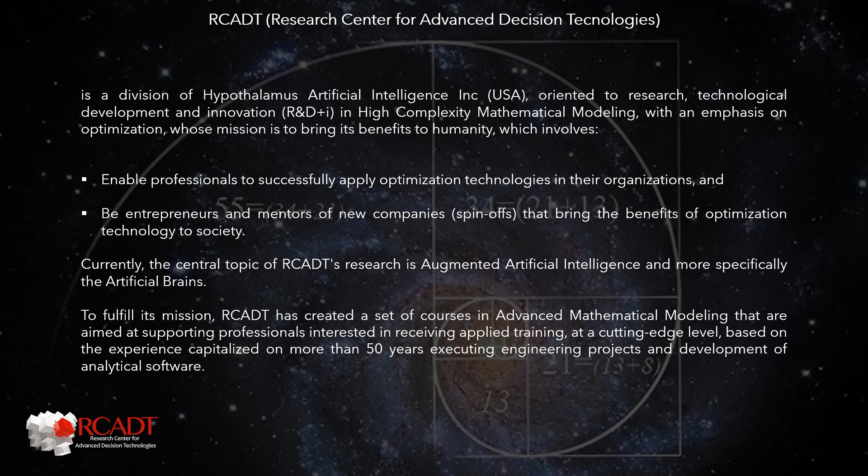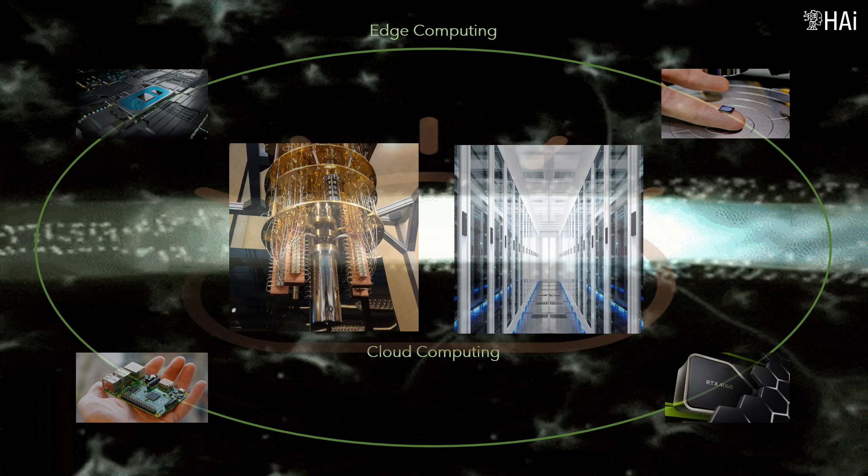Parallel thinking: like paper-based math, sequential math for single-processor computers is dead. As in the human brain, in the future only parallel mathematical thinking will be practical. The new analytics are autonomous, parallel, and distributed.

Objective and structure: the material covered in the course spans two broad areas of applied mathematical programming — oil and gas systems and markets modeling, and implementation of O&G enterprise-wide optimization systems. Both topics are addressed from HI's vision of multi-problem mathematical models, in which the development of computer solutions is oriented from the programming of algebraic formulas to the structuring of models, integrating the problems that make it up, like a Lego game.

The student will learn about the main technologies for the implementation of mathematical programming algorithms, and will learn to see them from this point of view, typical of Industry 4.0. But it is not a specialized course in algorithm implementation.

Structure: the course is based on specialized academic activities aimed at training the participant in the main mathematical problems that must be solved in the strategic and tactical planning, operations scheduling, and process control of oil and gas systems and markets. The basic unit of the course is the virtual session, with an average duration of 90 minutes each.

To do this, the classes are recorded on video by artificial intelligence. The classes are grouped into modules that cover the petroleum product supply chain. After watching the videos, students must attend face-to-face virtual sessions in which the course teacher will clarify existing doubts. Two conversations are held monthly, and students should submit their questions in advance.

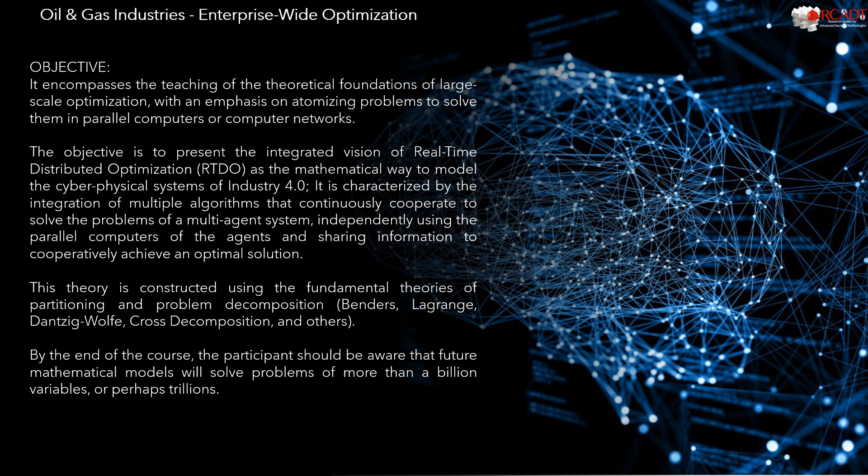The course covers the following topics: next-generation analytics and advanced computing, parallel thinking for the partitioning and decomposition of complex systems, oil and gas industries, enterprise-wide optimization, specifically Benders' partition theory, Lagrangian relaxation, Dantzig-Wolfe decomposition, cross-decomposition, subrogate programming, and asynchronous parallel optimization, sliding optimization, advanced concepts of artificial brains, and implementation of oil and gas industries enterprise-wide optimization in the real world.

For the different methodologies, examples of real-world problems and computer programs are presented, so that the student understands the application of what is taught.

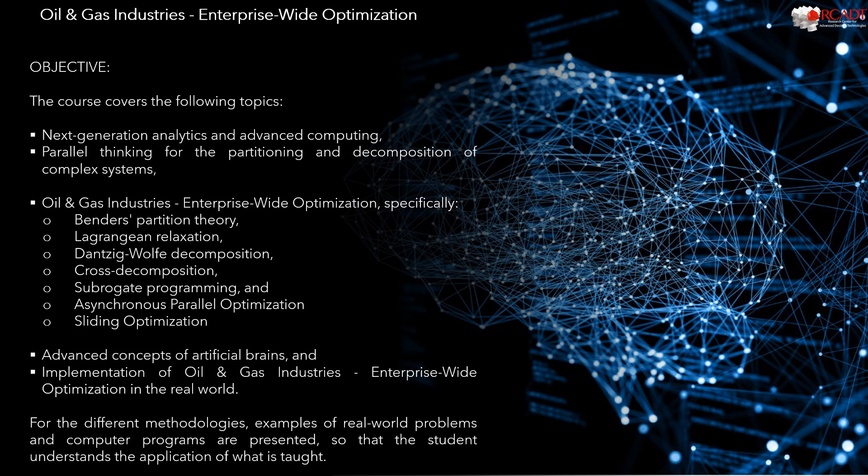Aimed at professionals, engineers, data scientists, mathematicians, physicists, consultants, economists, software developers, etc., who require and/or wish to become experts in mathematical modeling, acquiring the knowledge to handle the state-of-the-art parallel and distributed analytical level, using mathematical programming intensively.

This continuous training program strengthens the analytical skills and professional criteria of the participants, so that they can exercise, share and/or supervise, with propriety, the professional functions of this branch of knowledge, in accordance with the state-of-the-art methodologies and technologies that support the digital transformation of companies.

The course is aimed entirely at the oil and gas sector; therefore, all the material will deal with this industry and other energy-related businesses. Obviously, those who get the most out of the course are mathematical modelers expert in the oil and gas industry. But executives, managers and engineers in the industry are trained to understand the present and future of artificial intelligence for decision-making, to structure and participate in projects of this science of the future.

Artificial intelligence is accessible to everyone, but understanding its true scope requires proper training. AI can teach knowledge, but it cannot create understanding. This is the responsibility of the student.

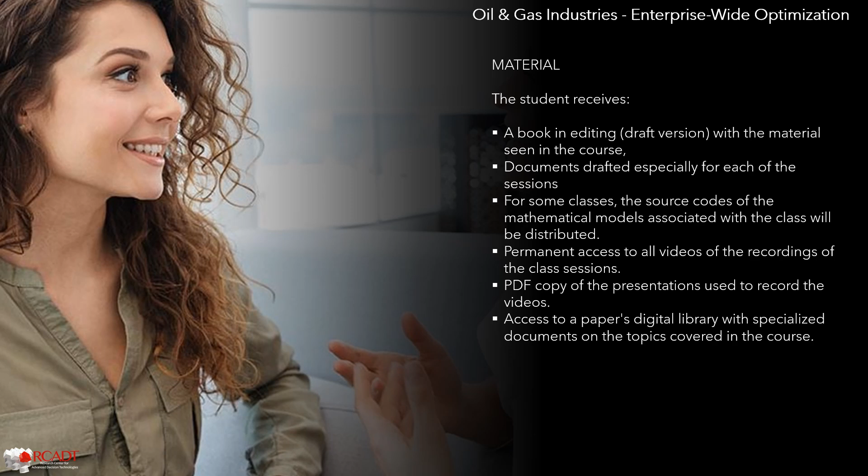Material. The student receives a book in editing, draft version, with the material seen in the course, documents drafted especially for each of the sessions; for some classes, the source codes of the mathematical models associated with the class will be distributed. Permanent access to all videos of the recordings of the class sessions. PDF copy of the presentations used to record the videos. Access to a papers digital library with specialized documents on the topics covered in the course.

Project. If the student wishes to carry out an advanced analytics project during the course, they can indicate this to the scientific director. If accepted, an advisory program on the project would be jointly defined between the RCADT and the student.

Artificial Hypothalamus: Mathematical Programming 4.0, Autonomous Real-Time Distributed Optimization.

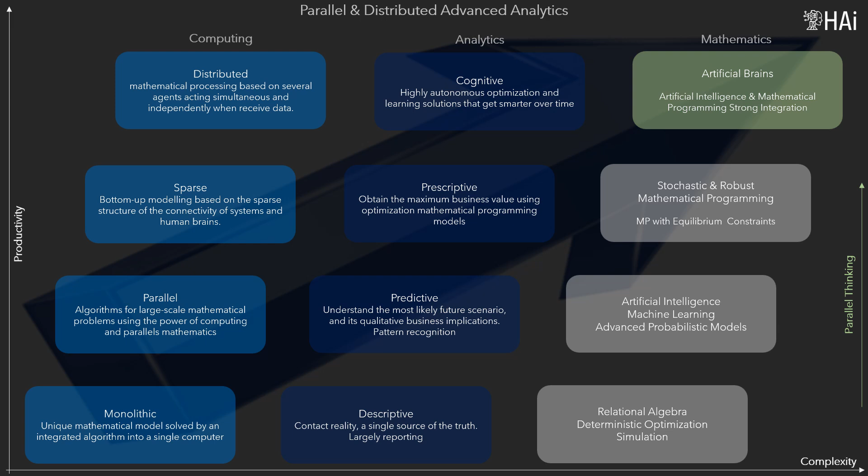Artificial entrepreneurial brains rely on the development of parallel thinking when a complex system must be analyzed. And reality is complex. The diagram presents the simultaneous evolution of 3 fundamental aspects in Industry 4.0: information technologies, analytics and mathematics.

The instructor of the course is Engineer Jesus Maria Velasquez Bermudez, Ph.D., who is the creator of the artificial hypothalamus, the result of the integration of mathematical programming with artificial intelligence based on neuroscience.

Most of the things and processes that humans use have been totally affected by technology, which has opened up the human imagination, producing previously unsuspected results. Mathematical modeling should not escape this process, starting from discovering the mathematical foundations that serve to establish the laws that govern physical, industrial, economic, biological, health, and social phenomena, and with them build mathematical models and increasingly powerful calculation algorithms.

Nowadays all knowledge and technology are available to develop a higher-level artificial intelligence, which emulates human intelligence in any type of human organization, and can be called the artificial hypothalamus of the organization. The power of today's technology is not in the mathematical calculations it allows to be performed, it is in the mathematical calculations we can imagine we can perform.

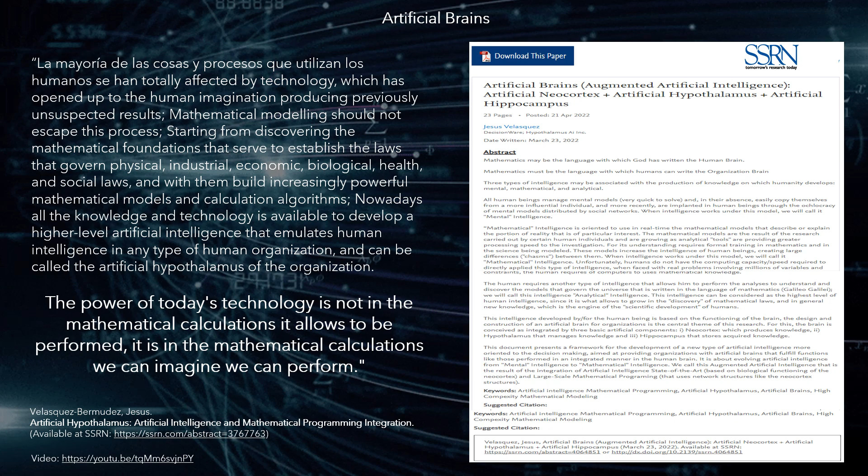The founder and chief scientist of HI is the creator of Optex, his most important technological work. The video: the history of Optex, the optimization expert system. From the simplex method to multi-problem models, Optex expertise meets artificial brains, moving toward mathematics-based general artificial intelligence.

And the article 'Optex, where optimization expertise meets artificial brains' presents the history of Optex, which is the professional history of Jesus Velasquez Bermudez. Jesus Velasquez Bermudez in 1990 created Optex, Optimization Expert System, an optimization platform that was developed with a new vision of mathematical programming. To date, Optex has completed 34 years of continuous growth and updating.

Proof of this is the current R&D plan that HI is developing to incorporate the latest achievements of AI, such as ChatGPT, to facilitate the dissemination of mathematical modeling in Industry 4.0, taking it to the level of people not specialized in the subject. You can find more information about Optex in the LinkedIn post: from simplex method to mathematics-based artificial general intelligence.

The founder of HI has focused his scientific research on the development and incorporation of parallel optimization algorithms to Optex. The algorithms created are Primal Dual Subrogate Algorithm (PDS), Multi-level Bender's partition (MBP), Generalized Stochastic Dual Dynamic Programming (GSDDP), Multi-Bender's decomposition (MBD), and sliding optimization. These algorithms, and others existing in the literature, support the implementation of artificial brains.

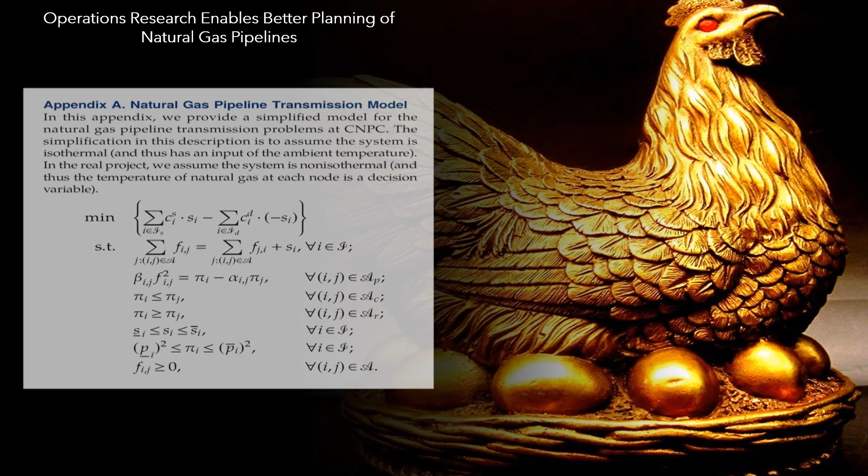The image presents the algebraic formulation of the natural gas pipeline transmission model. Without fear of being wrong, it can be said that mathematical optimization models are the goose that lays the golden eggs of China National Petroleum Corporation.

Oil and gas industries: Enterprise-wide optimization and advanced analytics solutions. The interested party can watch the webinar, in Spanish, live. Supply oil chain optimization, advanced analytics solutions, to have an overview of mathematical modeling in the O&G sector.

The oil industry includes global processes of exploration, extraction, refining, transportation and marketing of petroleum products. The largest volume products in the industry are fuels, natural gas, fuel oil, and gasoline. However, petroleum is the raw material for many chemicals, including pharmaceuticals, solvents, fertilizers, pesticides and plastics.

The table, elaborated by IBM, shows a summary of the optimization solutions for oil and gas enterprises. At the origin of mathematical models in computers, starting in 1947, decision support systems, which represent the optimization system of an oil company, have been visualized as composed of multiple mathematical problems, one for each line of the table, which are operated individually and communicated sequentially by humans.

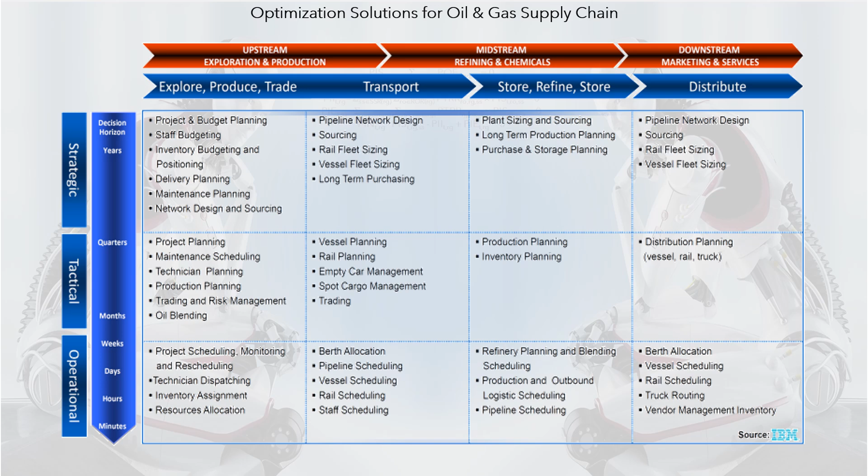This way of operating produces solutions close to the optimal, but not optimal, because they generally have no feedback. The current technological revolution completely changes this approach.

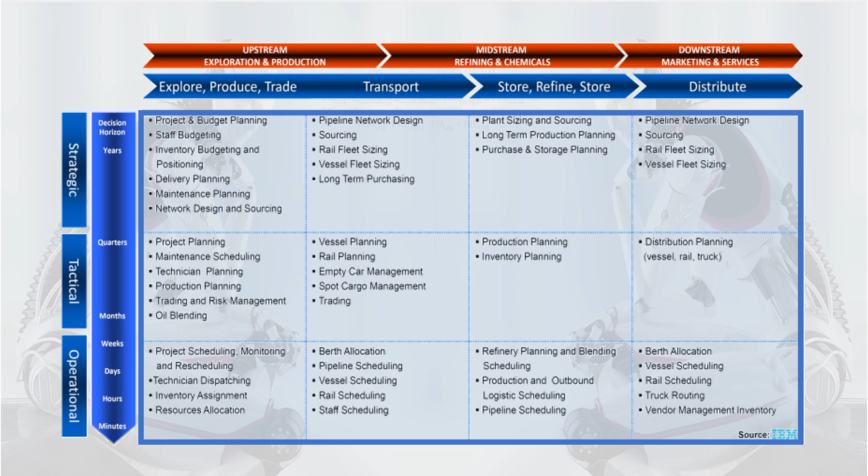Today, O&G's business optimization can be visualized as a single supermodel, composed of submodels, which in turn are made up of mathematical problems, one for each line of the table, which are solved by running in parallel, autonomously, communicating with each other, and managed by a mathematical artificial intelligence, produced by a generative artificial intelligence.

Hierarchical coordination of planning tools. It is traditional to organize decisions hierarchically into strategic, tactical and operational. The operational decisions are divided into the scheduling and advanced optimal control.

However, due to the technological progress generated by Industry 4.0, mainly in relation to smart metering systems, nowadays we can talk about a new type of online optimization modeling, real-time distributed optimization.

From the point of view of mathematical modeling, hierarchical levels are intertwined and coordinated through the boundary conditions in time, and common modeling that can be shared. The modeling strategy of HI is that all models of a decision support system can communicate with each other.

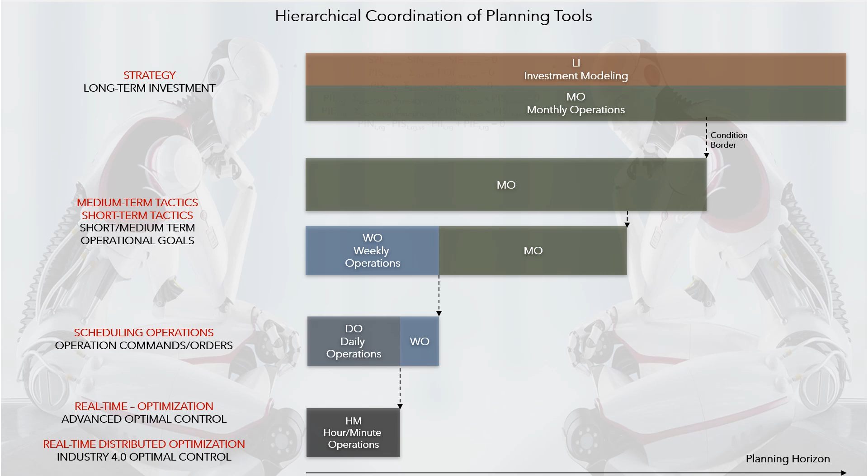Large-scale optimization and artificial brains. One of the fundamental ideas of the artificial brain is the atomization of the system, a bottom-up approach, to integrate multiple mathematical models, using the framework of large-scale optimization methodologies, like multi-level Benders theory, and Lagrangian relaxation.

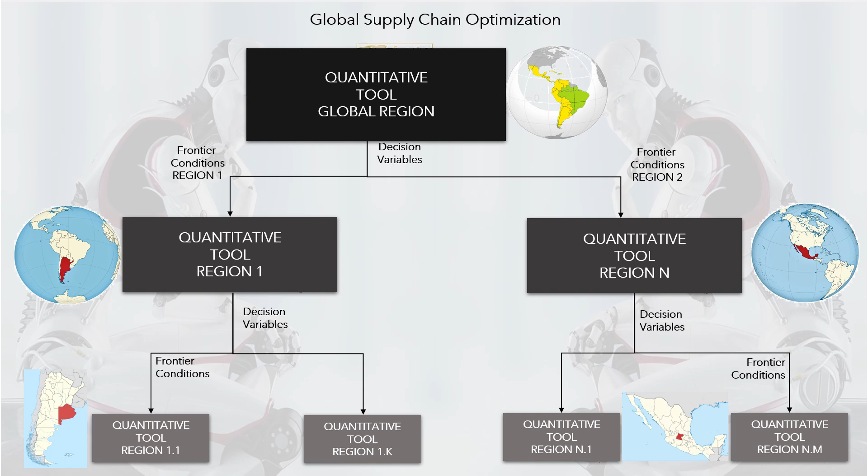The same system can be organized hierarchically from multiple points of view. Because they are the same system, all these views must be equivalent. That is, in a non-degenerate optimization model, they have the same solution. The image presents the hierarchy from the point of view of regionalization.

Considering the vision of large-scale optimization, which can have multiple points of view, HI developed the multi-Benders decomposition (MBD) algorithm to emulate the coordination of multiple points of view, just as the human brain does, following the studies carried out by Jeff Hawkins, summarized in his book, 1,000 Brains.

On the other hand, if other intelligent structures are studied, different from the human brain, it can be concluded that this structure is not necessarily the best, and that there are alternatives in nature that can be artificially implemented.

An example is the octopus, which has 9 brains, 3 hearts, and 2 memory systems, which it uses to control each of its 8 limbs independently, allowing it to move nimbly and react quickly to any threat. In addition, it has a central brain that hierarchically coordinates the secondary brains.

This is one case, among several, of beings with multiple brains. It is evident that the structure of cephalopods is reproduced in human organizations, so a multi-brain artificial brain can be useful. In the global nature of modern companies, which must fulfill planning functions at different levels of their regional distribution for industrial, financial, and commercial operations, a multi-brain artificial brain structure is useful, as in cephalopods.

This hierarchical vision of the system can be converted into a different, but equivalent, approach. A vision focused on the mathematical neurons, which form a network connected according to the map established in an artificial cerebral cortex, forming what would be an artificial hypothalamus, which feeds its decisions from an artificial hippocampus, which stores the history of the system, in terms of math models, and executions of these models.

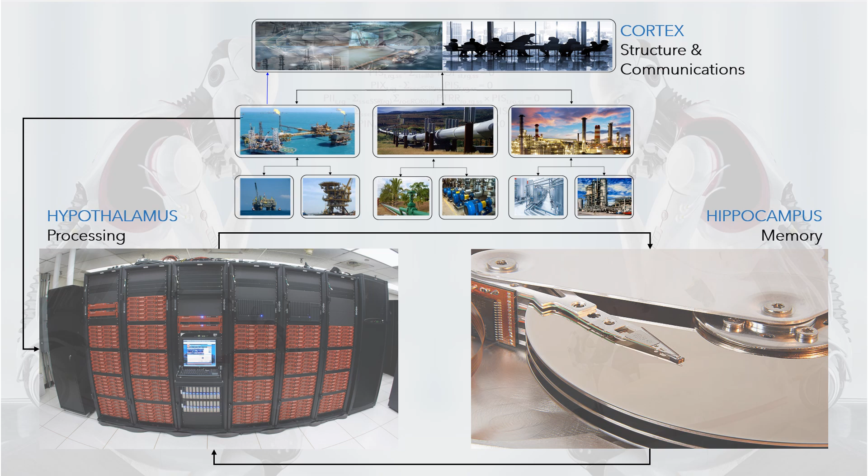Like the human brain, the artificial brain is made up of the following artificial components. Neocortex acts as an organizer of the connectivity of mathematical artificial neurons. Hypothalamus, it is the central processor that coordinates all the models included in an artificial brain, and hippocampus, it is the memory of the brain that stores the history of what is happening in terms of mathematical model runs.

It is coordinated by a traditional artificial net. The most important planning function in a company may be integrated business planning, IBP, which integrates, at least, 3 areas: finance, marketing, and sales, and production.

The IBP model can be looked at from 3 points of view: 3 independent models, which are integrated through a process in which the input of one model is the output of another; a monolithic model that integrates the 3 models, and that is run periodically; and an artificial hypothalamus that acts autonomously, in a distributed way, in real time.

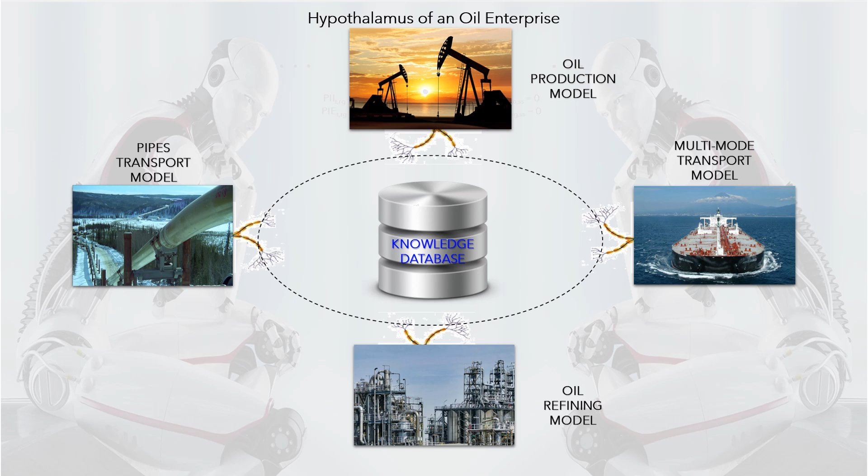Oil and gas enterprise-wide optimization system integrates mathematical models for each of oil and gas's supply chain links, so that supply chain planning is managed with a holistic view. At the level of industrial facilities, the oil and gas chain involves connection between industrial facilities, using multimodal transport systems.

Based on the models to be integrated, and considering the magnitude, and the association between them, it is considered that the hypothalamus of a refinery business should be made up of 5 subsystems: oil refining and petrochemical; refinery industrial services; water treatment; multimode transport; and financial and fiscal.

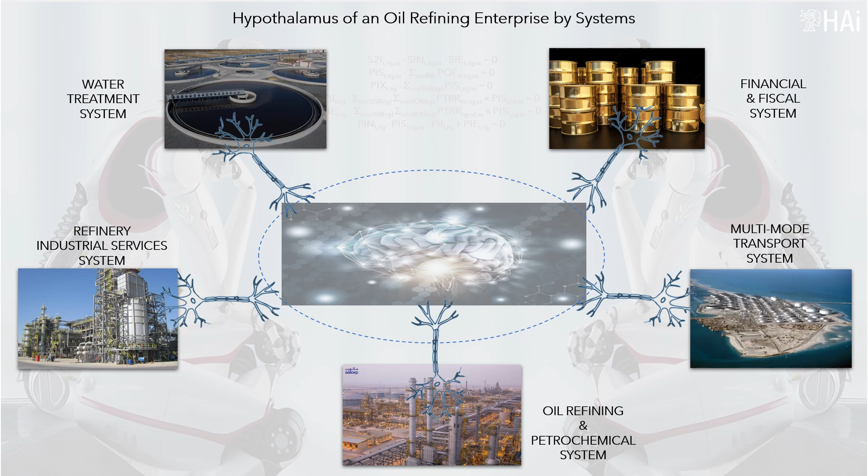Now, if you look at each business from the point of view of functionalities, you have an artificial brain made up of multiple models, associated with the problems of the administrative functions of each industrial plant. It generates another brain of the same problem.

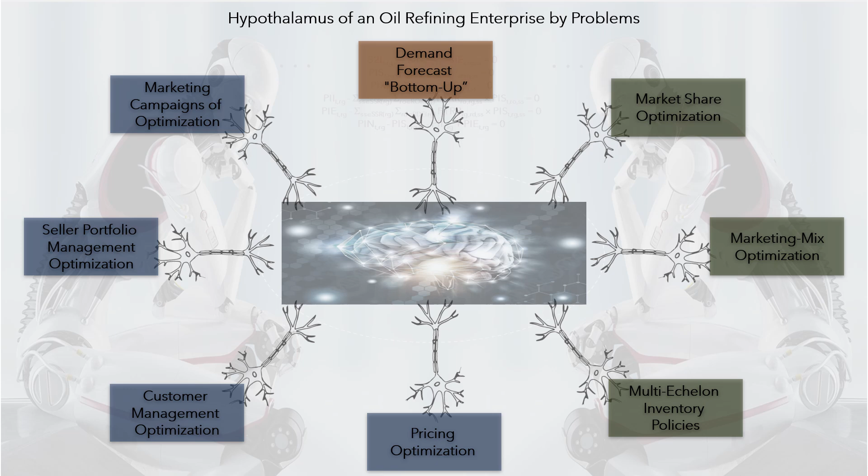Artificial brains can share models such as production, where the sales and operation planning model belongs to the brain of systems and the brain of functions. In the same way, the models can share math problems, and the problems can share equations.

Construction of artificial brains. The methodology for building an artificial brain follows a formal modular process, which HAI calls structured mathematical modeling. First, all mathematical equations, and their components, are stored in a relational database, part of an artificial hippocampus, which can be handled using SQL, standard query language. This implies an open and standardized structure, which is not common in mathematical modeling.

Sets of constraints form problems, called by HAI mathematical artificial neurons, and sets of problems form models, and a set of models forms an artificial hypothalamus, which is linked to the corresponding artificial cortex, a network of mathematical artificial neurons, and the artificial hippocampus, memory, which stores, in addition to mathematical formulations, the history of all model runs.

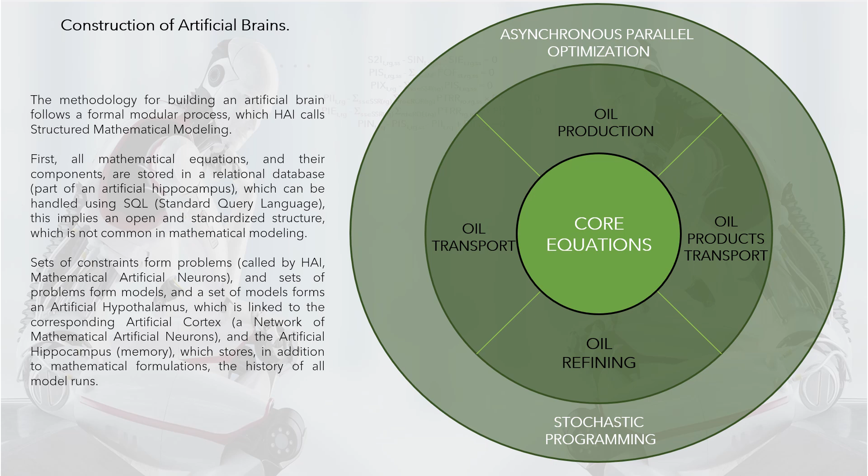From the concept of integrated business planning, it evolved towards enterprise-wide optimization, which implies expanding the coverage of the decision support system, which HAI calls enterprise-wide optimization systems. Visually, it is easy to see the evolution of the IBP concept to EWO, which covers all operational functions of an industrial organization. This leads us to two problems that must be solved from a computational point of view.

If traditional approaches are used, many programmers are required to generate all the source code needed to develop and coordinate all models, and it takes a lot of computational power to solve the built-in problem. In order to solve this situation, HAI has developed OPTEX, Optimization Expert System, a generative artificial intelligence, which is responsible for producing all the source code required by an artificial brain, using large-scale optimization methodologies to solve complex high-dimensional problems.

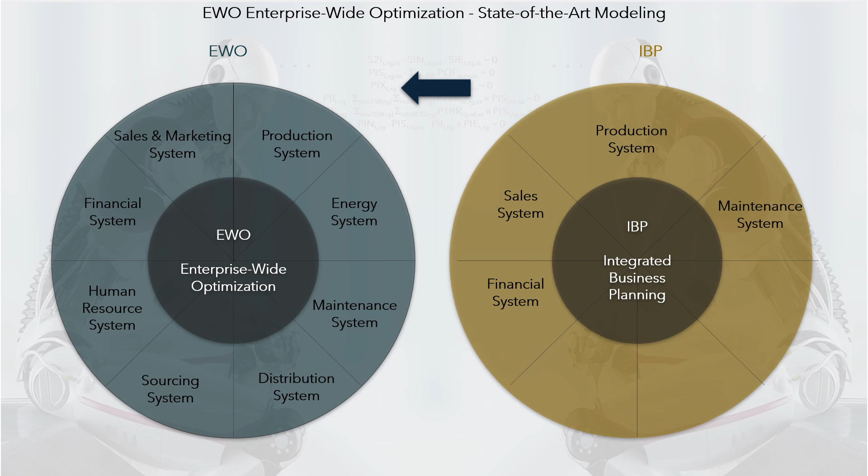The diagram presents an artificial hypothalamus of an IBP process. Those interested in learning more about artificial brains are invited to read the white paper, Oil and Gas Artificial Brains: Case Pipelines Transportation, which is part of the course material.

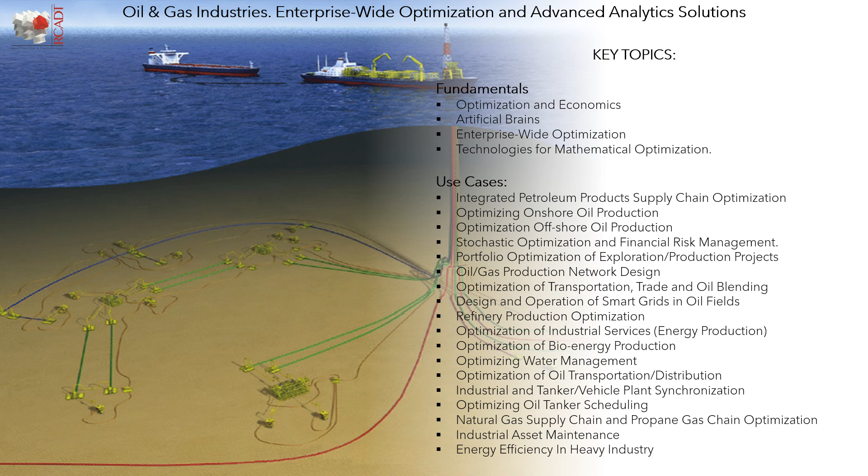Hypothalamus artificial intelligence brings real-world oil and gas business optimization practice to academia to teach enterprise-wide optimization systems implementation. The image presents the main topics that will be covered in the course. These are divided into fundamentals and use cases. Use cases are related to solving a real-world math problem solved by HAI or for other institutions. In several cases, the programs used to solve the problems are presented and analyzed. Below are different topics that the course covers.

Oil and gas production optimization. Integrates reservoir behavior as part of the optimization model, considers four fundamental aspects: production system, reservoir behavior, operating modes of wells, and flow in the hydraulic system. The image presents the main models associated with the production of oil and gas.

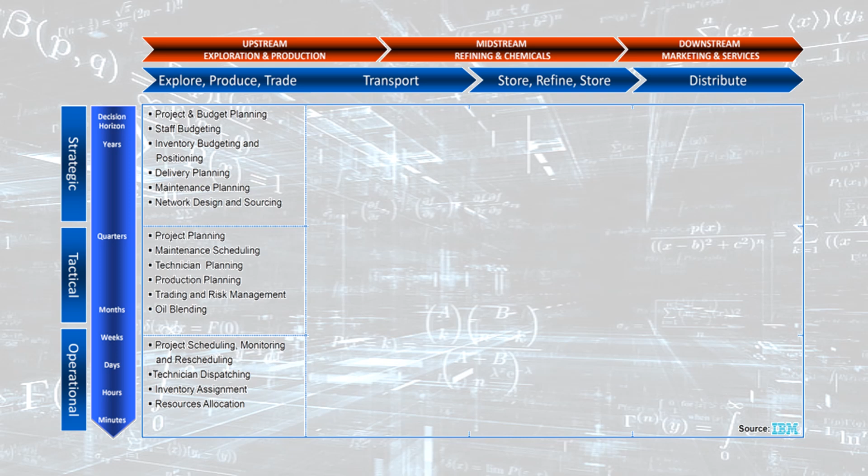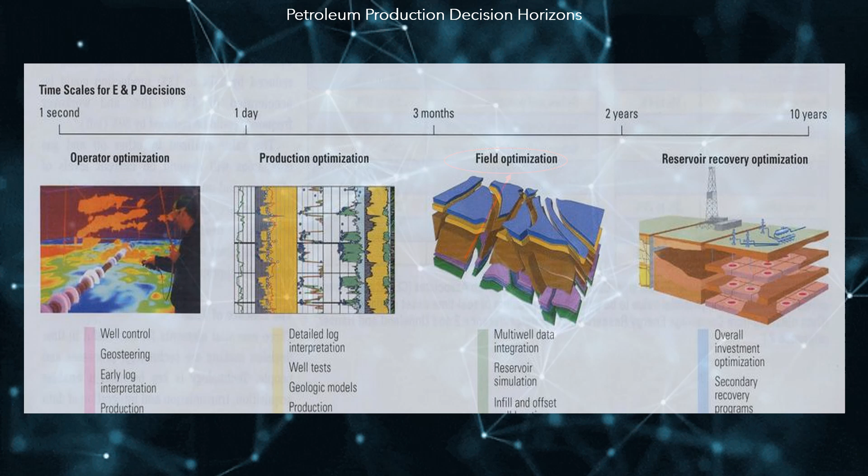The objectives of optimization models depend on the planning horizon, and can be divided into real-time, advanced control, scheduling, short-term production optimization, planning, medium-term field optimization, strategic operations planning, long-term planning, reservoir recovering optimization, and strategic investment planning, portfolio optimization in oil exploration and production.

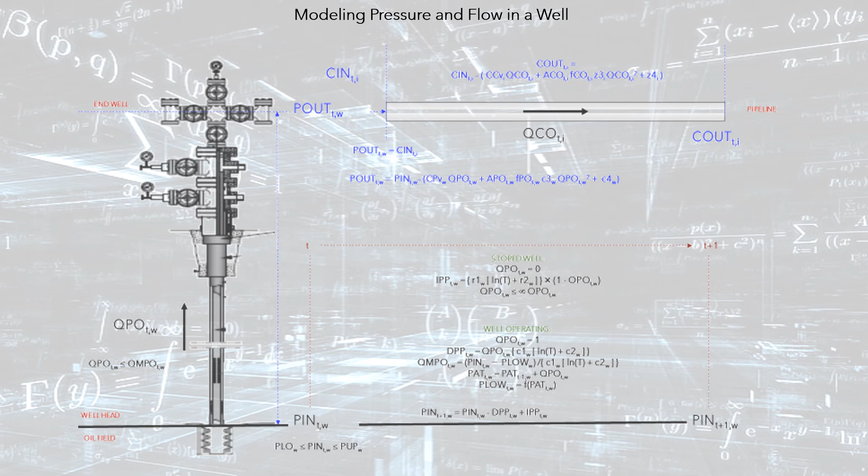The diagram summarizes the connectivity of the mathematical elements that allow modeling the well, in the aspects related to the pressure and flow of hydrocarbons, along the hydraulic system that is part of the production system. Operations planning integrates multiple fields, which in turn comprise multiple oil or gas reservoirs, which are operated by means of multiple interconnected wells. Interconnection, which occurs at the surface facilities, allows gas and oil to be sent to storage for subsequent release through a transport system.

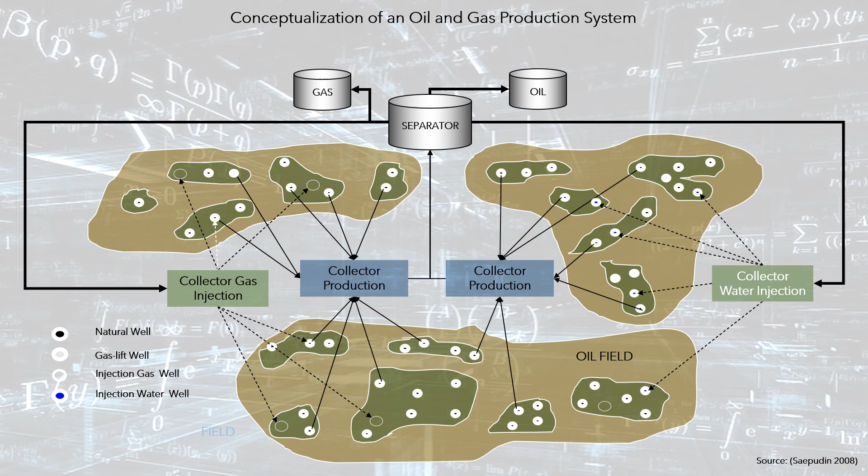The goal of optimization is to determine the contribution of each well, to meet demand while minimizing the total cost of the operation during the planning horizon, which is associated with energy consumption in the production system, plus investment in adaptation of deposits when restructuring of the productive system topology is allowed in the model. Smart grids, flue gas and hydrogen production in oil and gas fields are new activities that need to be optimized in the oil industry.

Oil transport, trading and blending optimization corresponds to a dynamic model that optimizes oil distribution between fields, refineries and ports, the oil mix for use in refineries, the mixture of oil for export in accordance with quality standards and established supply contracts, import of oil according to offers in the spot global oil market, and import/export of oil according to offers in the oil derivatives financial instruments.

Oil transport, trading and blending optimization corresponds to a dynamic model that optimizes oil distribution between fields, refineries and ports, the oil mix for use in refineries, the mixture of oil for export in accordance with quality standards and established supply contracts, import of oil according to offers in the spot global oil market, and import and export of oil according to offers in the oil derivatives financial instruments.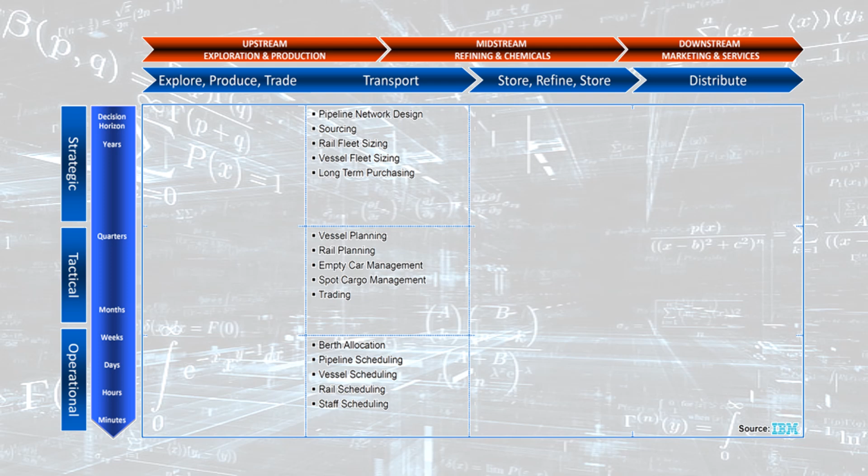Pipelines planning and scheduling. The image presents the main models associated with the transport of oil and gas. Piping systems require at least 3 models to coordinate their operation: S&OP, tactical planning, on the order of months, weeks; SCH, daily operation scheduling, such as tenders planning; and RT, real-time, on the order of hours.

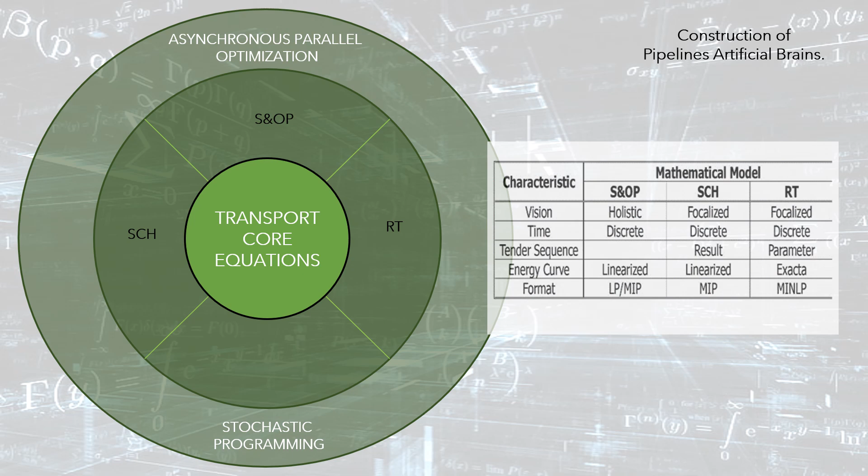Under the principle of transitivity of algebraic formulations, models grow in complexity as they descend from the hierarchy of decisions. All models share equations, mainly those related to the physical process. Therefore, they can be made in a continuous modeling process.

The models of higher hierarchy will be more aggregated, in order to cover long periods of analysis, of the order of years. The emphasis of the model should include the interpretation of the economic and technological future, so it is appropriate that they are stochastic optimized. As the models approach real time, the level of detail increases and the planning period decreases, the most important being the engineering representation of the process.

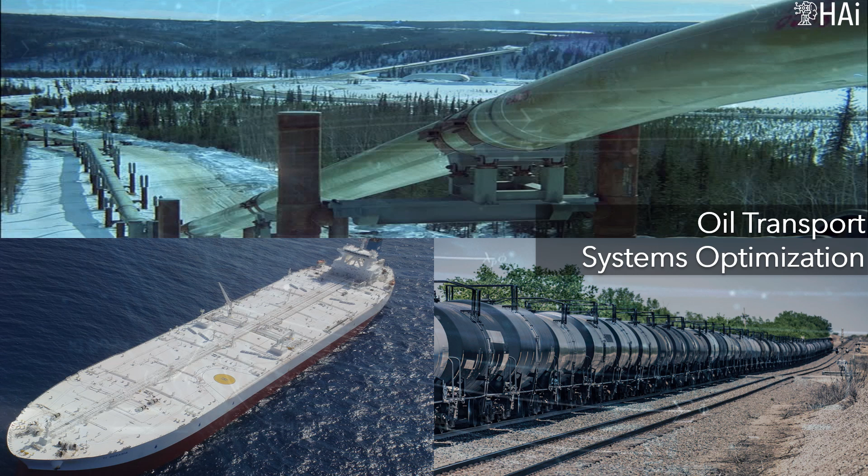Oil transport systems optimization corresponds to a general model, common to all types of oil products, raw, refined, natural gas and biomass, which represents the process for a specific system, including particular equations when this is required. It considers 2 types of transport modes: pipes and multimodal vehicles, like vessels, barges, train tanks, and/or truck tanks.

Kalman filter applications. Prognostic and health management, PHM, maintenance in pipelines.

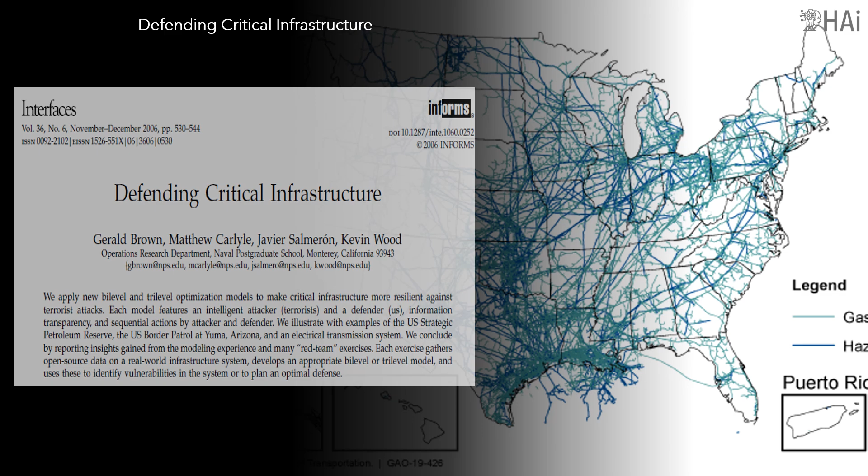Critical infrastructure protection. Development of tools to anticipate, identify, and measure the risks to which a nation or region's critical infrastructure is exposed. This is to reduce the risks and consequences of an attack. Bi-level and tri-level optimization models to make critical infrastructure more resilient against terrorist attacks are used. Each model features an intelligent attacker, terrorists, and a defender, us, information transparency, and sequential actions by attacker and defender.

3 real examples are presented: the U.S. Strategic Petroleum Reserve, the U.S. Border Patrol at Yuma, Arizona, and an electrical transmission system. Each exercise gathers open-source data on a real-world infrastructure system, develops an appropriate bi-level or tri-level model, and uses these to identify vulnerabilities in the system, or to plan an optimal defense.

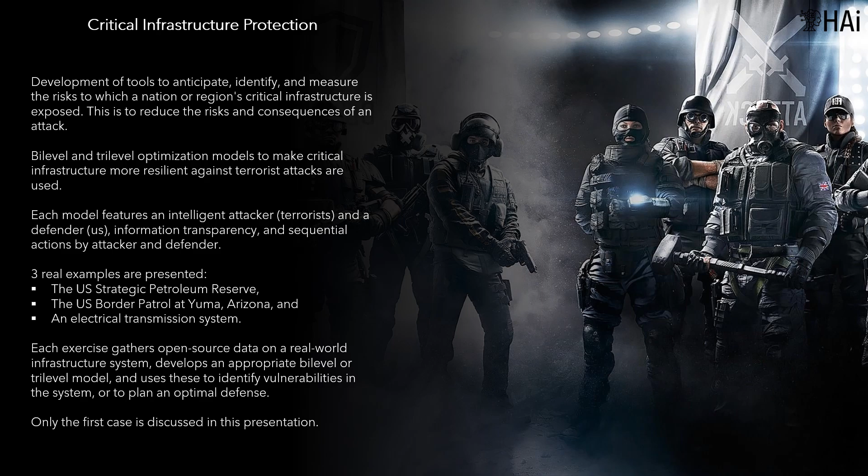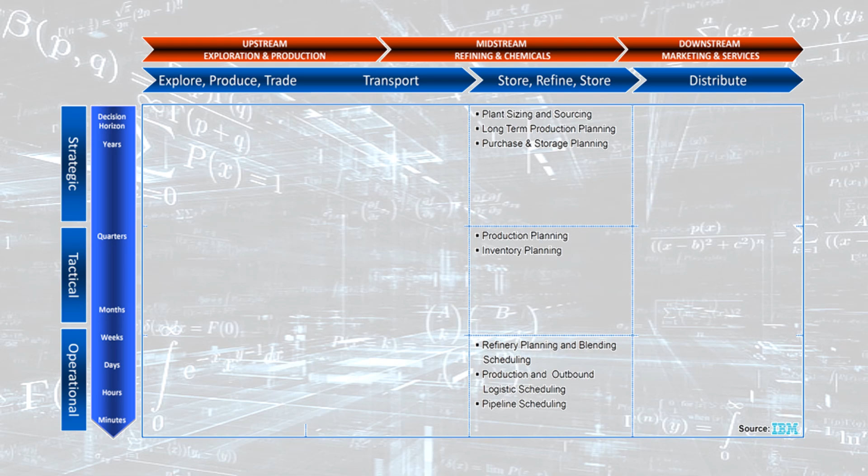Oil refining optimization includes a generic model that can serve interchangeably to plan the crude and/or biomass refining processes that may be spatially detailed in all units used in the production of refined products. The image shows the main models associated with the operations in the oil refining and petrochemical plants.

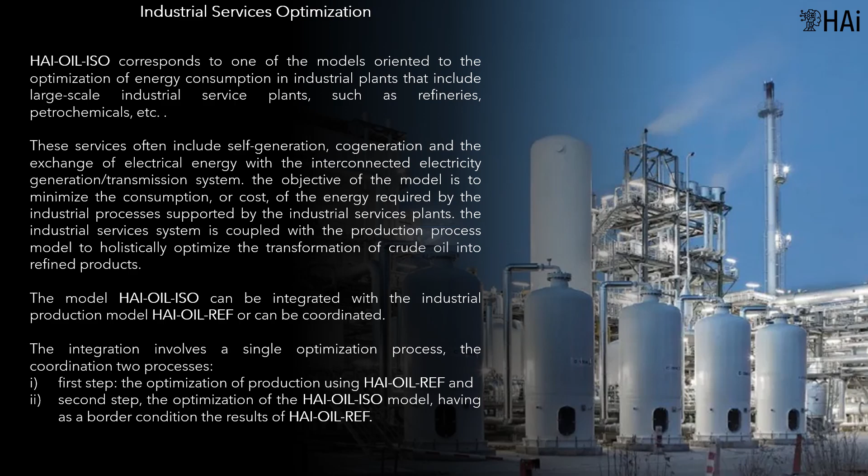The industrial services system is coupled with the production process model to holistically optimize the transformation of crude oil into refined products. The simultaneous optimization of both industrial production and energy conversion is related to polluting emissions of gases and liquids, associated with increasingly demanding environmental control laws.

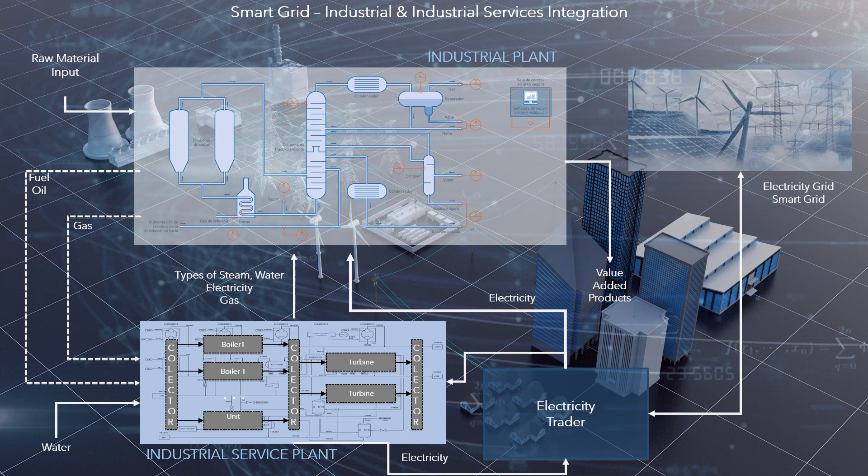HAi may integrate complex industrial process models to redesign the power supply system, according to the new power technologies. This type of model includes the simulation of polluting processes to determine the optimal mixture of fuels, in accordance with environmental regulations. Water consumption minimization in industrial complexes. Natural gas supply chain optimization.

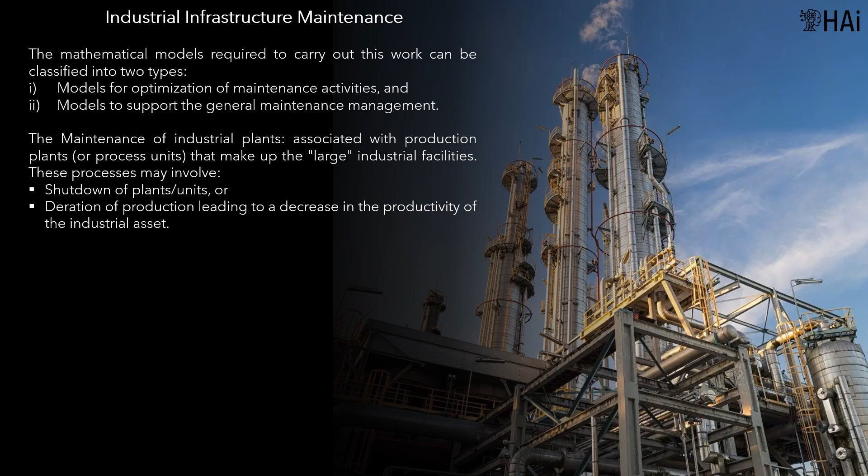The maintenance of industrial plants, associated with production plants, or process units, that make up the large industrial facilities. These processes may involve shutdown of plants/units, or deration of production leading to a decrease in the productivity of the industrial asset. Those interested in learning more about this topic can watch the video.

Enterprise risk management, ETRM. The idea behind ETRM is that an organization, while it can't eliminate risks, it can manage the risk. ETRM is a scientific approach to shaping risk, which is based on operations research methods such as applied probability and statistics, stochastic simulation, and investment portfolio optimization.

In the case of integration of production and finance, there are originally two models, S&OP and ALM. These models can be summed, resulting in a mathematical model containing the constraints of the two models, forming the S&OP-ALM model. The user will have three models, the original ones and the integrated model. The integration process can be conceived as the S&OP model that generates results, production and sales, which must be transformed into financial results, in the ALM model, in such a way that the financial statements of the organization are produced, the control of which is the true objective of a private company.